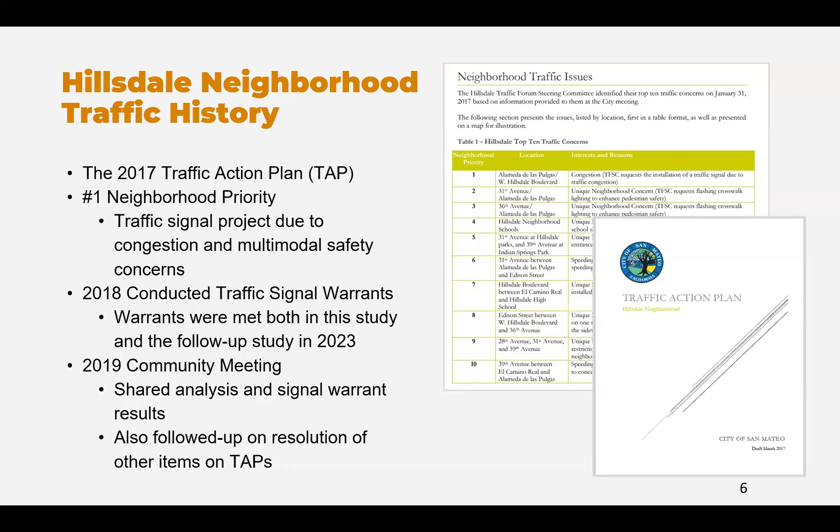In 2019, we held a follow-up community meeting with the Hillsdale neighborhood regarding not only the number one priority, but their top 10 traffic concerns, where we were able to share the analysis results for the Alameda Hillsdale Boulevard intersection, as well as our signal warrant results, sharing with them that the data came back and we could install a traffic signal there as a future project. We also followed up on resolution of different items on the traffic action plan list.

Next, we can move into some of the background items more local to the intersection, as well as pertinent to why the intersection sees the issues that it currently does. The intersection of Hillsdale and Alameda de las Pulgas involves the city's two arterial roadways, Hillsdale being one and Alameda being the other. An arterial roadway is a type of road that serves as a major thoroughfare for the city's transportation network, meant to carry larger volumes of traffic relative to other roadways within the city, for example relative to Fernwood Street or Stephen Road.

Within a half-mile radius of this site exist three schools: Hillsdale High School, Abbott Middle School, and Laurel Elementary School. We have a few parks within the area, so we have a lot of pedestrian activity to access those sites. We also have a hospital, the Hillsdale Branch Library, as well as residential housing.

Currently, the traffic control at the intersection is an all-way stop. If you've driven through there before, or walked or biked, you would be familiar with that. Congestion is apparent during peak traffic hours, especially morning and afternoon, as those hours typically coincide with school pickup and drop-off. Because of that, and because of the intersection's close proximity to the three schools, there are also pedestrian and bike safety concerns. We have a good amount of students using active modes of transportation to get to their final destinations. All these considerations were important for us, not only for satisfaction of the signal warrant study, but also for the different design elements I will talk about later tonight.

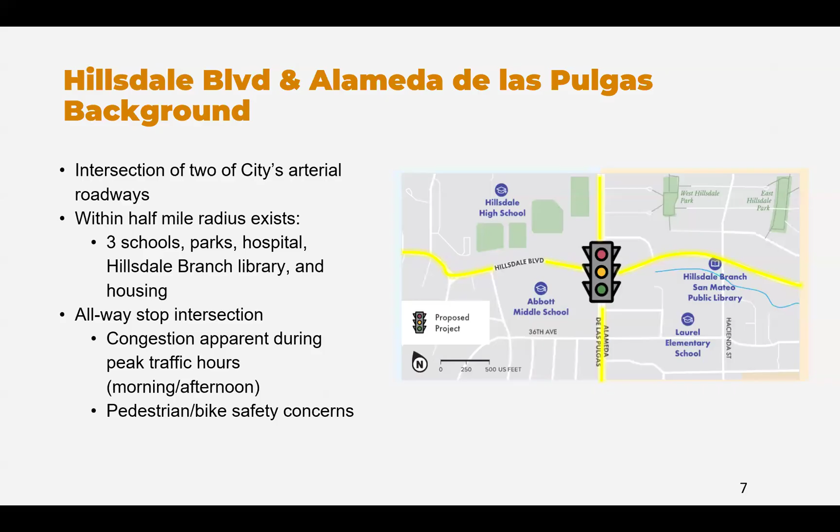Here are the project goals we're looking to satisfy. Firstly, we're looking to reduce neighborhood cut-through traffic through implementation of this project. Currently we have congestion as the all-way stop fails to properly satisfy the demand faced at the intersection. Through our analysis, we found that through signalization efforts, the level of service at the intersection, or the average delay an average driver would experience going through, would decrease significantly. We believe that through that, drivers will be more inclined to take the intersection as opposed to bypassing it altogether, taking alternate routes around it.

Secondly, it also improves pedestrian and bike safety, which are city council priorities for public works this fiscal year, specifically numbers 28 and 40, as well as the general plan policies per the circulation element of the city's General Plan 2040. I'll read them off quickly: C1.2 complete streets, 1.3 vision zero, 1.4 prioritizing pedestrian and bike mobility needs, 3.1 pedestrian network, 4.1 bike network, and 6.1 roadway operations. So as you can see, this project is not only an installation of a traffic signal, but also engineered solutions we're looking to implement to increase all modes of travel and enhance safety of all modes of travel at this intersection, while also reducing congestion.

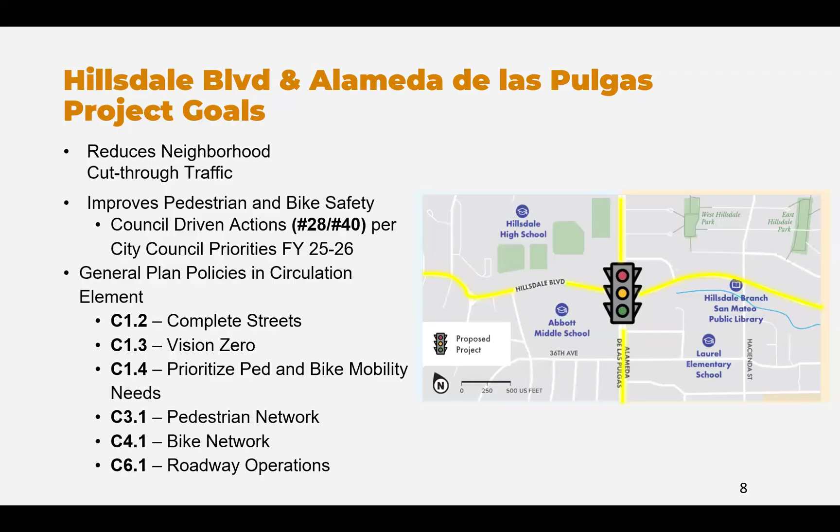With the project overview out of the way, I can also recap on some of the outreach efforts that were done in 2024.

In phase one, we met with the public at the Hillsdale Branch Library. We also met with the hyperlocal residents at the four corners of the intersection in May of 2024. We canvassed door to door to get people to know about the upcoming meetings and the project. We had A-frame messaging along the corridor and other high pedestrian activity areas. We also had an online survey up before the community meeting and a few weeks after, to get specific feedback from residents who wanted to share their vision for how the intersection project should be implemented.

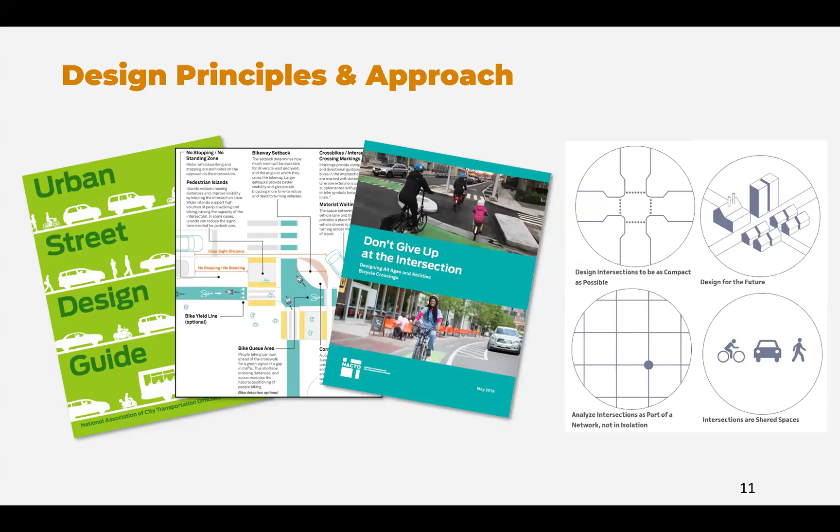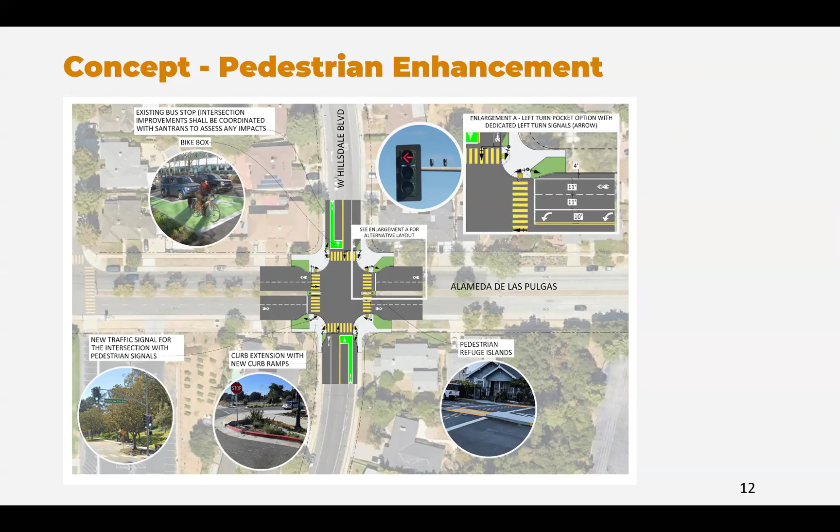This was one of the two design concepts shared at the January 2024 meeting. This design was largely focused on enhancing current pedestrian concerns and pedestrian safety at the intersection through curb extensions, pedestrian refuge islands, and the option for a dedicated left turn signal to separate vehicle and pedestrian phases. Here are those curb extensions I was discussing, the pedestrian refuge islands, and the option for the dedicated left turn signal.

The pedestrian and bike safety will ultimately be achieved with the implementation of protected corners, essentially spaces that only bikes and pedestrians would access. Through engineered measures and sightline principles, drivers will generally be more aware of other users at the intersection. The protected corners also achieve shortened crossing distances, acting as a curb bulb-out like the prior design.

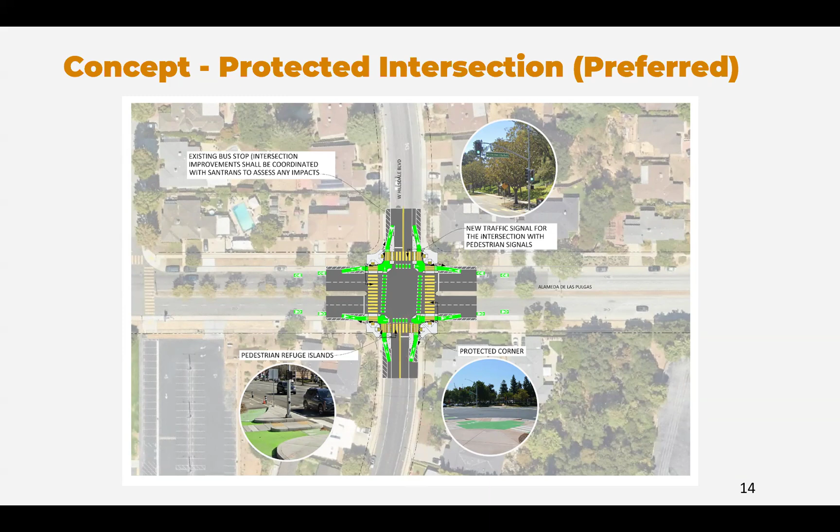So here I'll zoom in a little bit. We have the protected corner. Pedestrian refuge islands were still able to be implemented through this option, and obviously the signal efforts as well.

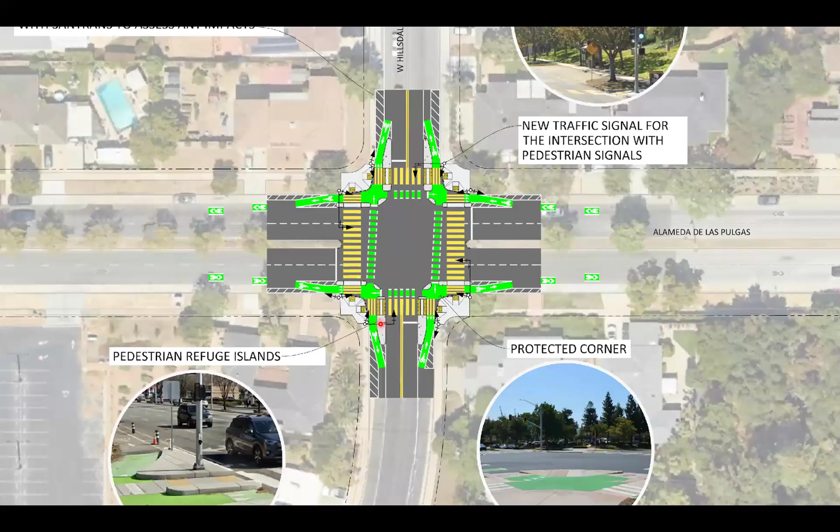The congestion caused by the signal was expressed by the community at this meeting, despite the fact that we did share a little bit about our traffic analysis done, and like I mentioned before, that the level of service would be much improved through the implementation of the signal. Lastly, drivers turn too quickly at the corners of the intersection currently.

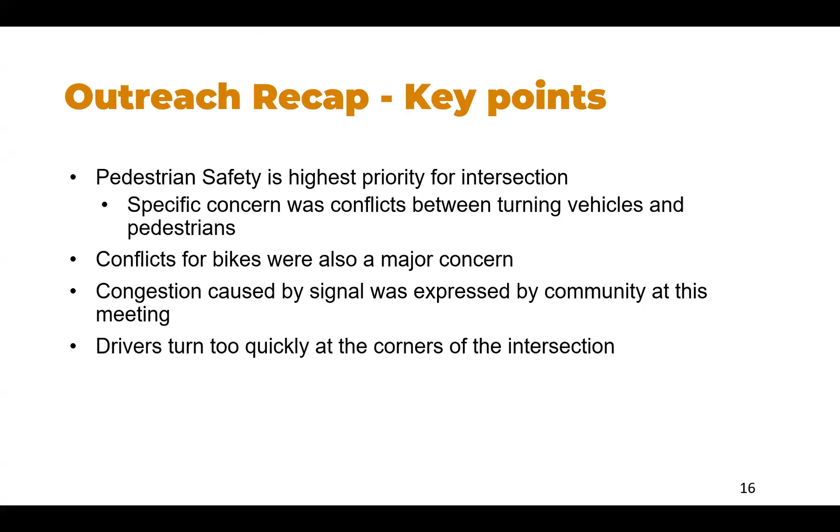So with that, in the next few slides I'll be going over the revised design, which further developed the community's preferred protected intersection concept, while simultaneously looking to address some of the feedback received during the January 2024 meeting, as well as feedback received from other stakeholders. Of note is that we were actually able to incorporate certain design elements such as the dedicated left turn pocket and left turn signal for this design to address pedestrian safety concerns, as well as concerns related to congestion at the intersection.

So here's an overview of that revised design, a zoomed in shot. Here we have Alameda de las Pulgas going left to right, left being north, and West Hillsdale Boulevard going up and down your screen, west being towards the bottom of your screen.

The outreach key points I just read off are found on that smaller table to the bottom left of your screen. You can see through the revised design, in the second column of that same table, I bolded the language relevant to how this revised design was able to look at the feedback received and consider a specific design element to satisfy the concerns of our public.

So in this case, for pedestrian safety, the revised design reduces crossing distances for pedestrians at the intersection while providing the dedicated pedestrian crossing phase. Here we have those red arrows on your screen depicting the shortened crossing distances. Like I mentioned before, using those protected corners we're able to achieve a very similar effect that was shown at the pedestrian enhancement design concept. So folks using the intersection not only as a pedestrian, but also as a bike, will be generally less exposed to traffic as they cross Alameda or West Hillsdale Boulevard.

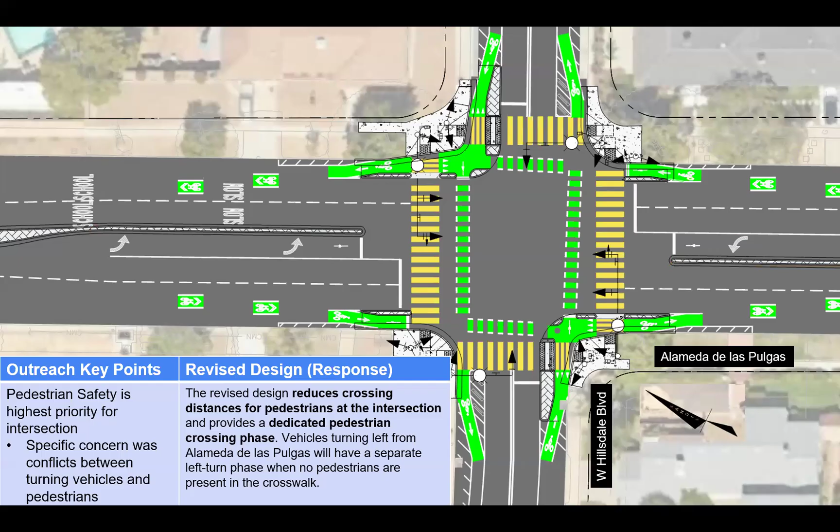Next, we have the outreach key point regarding conflicts for bikes being a major concern. Here on your screen, I've boxed those cross bike markings. Bikes will be able to navigate the intersection more comfortably, guided by these cross bike markings. I only highlighted the ones across Alameda, but we're looking to implement ones crossing West Hillsdale Boulevard as well, along with the use of these physically protected corners that restrict vehicle encroachment. Here I boxed the protected corners. Through the use of these corners, bikes will be essentially protected and shielded from vehicular traffic altogether, and bikes would be able to really be within the line of sight of a stopped vehicle.

So in this example, headed east, a bike would actually wait for their green light well ahead of a vehicle queued, also headed eastbound or making their left turn. This would generally improve their visibility and increase driver awareness, helping to reduce the potential for right hook collisions. The benefit of these protected corners also allows bikes to complete a two-stage turn relatively comfortably, especially for less experienced bikers looking to navigate this intersection. This is definitely one such advantage from the protected intersection concept that we are happy to incorporate.

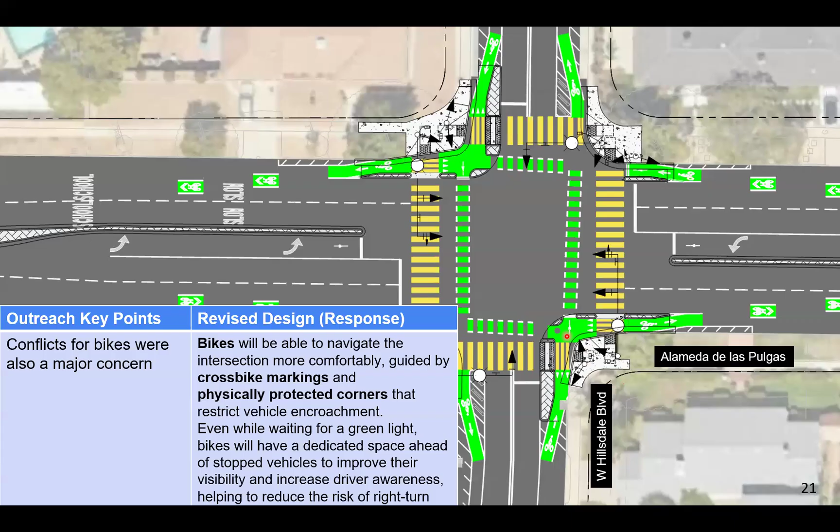Next, we definitely heard feedback from residents that even despite the signalization efforts, congestion would be caused by the signal. So this revised design actually accommodates the left turn pockets as mentioned before, providing that dedicated left turn phase for traffic turning from Alameda onto West Hillsdale Boulevard. This improvement relieves current traffic and turning congestion while also reducing those conflict points between pedestrians and drivers.

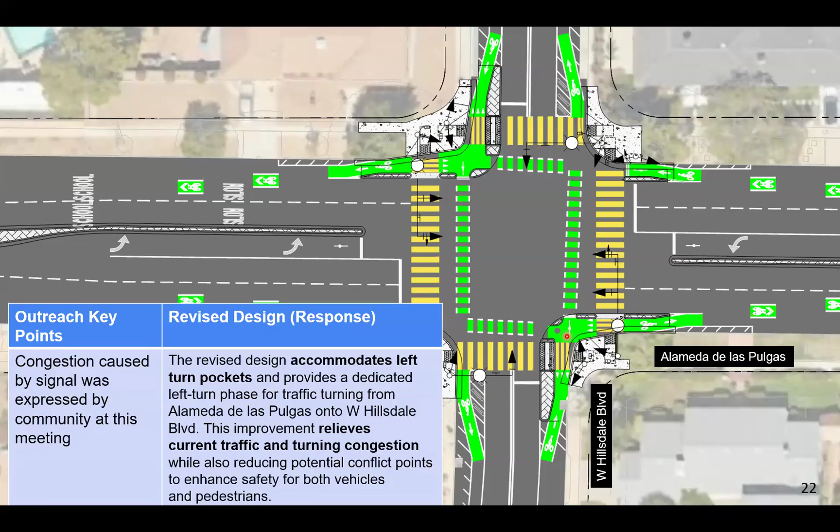And lastly, drivers just turning too quickly at the corners of the intersection. So with this revised design, we were able to basically keep the protected corners, but we added rubber speed wedges to encourage drivers to make slower and more deliberate right angle turns, improving visibility and safety for all modes of travel.

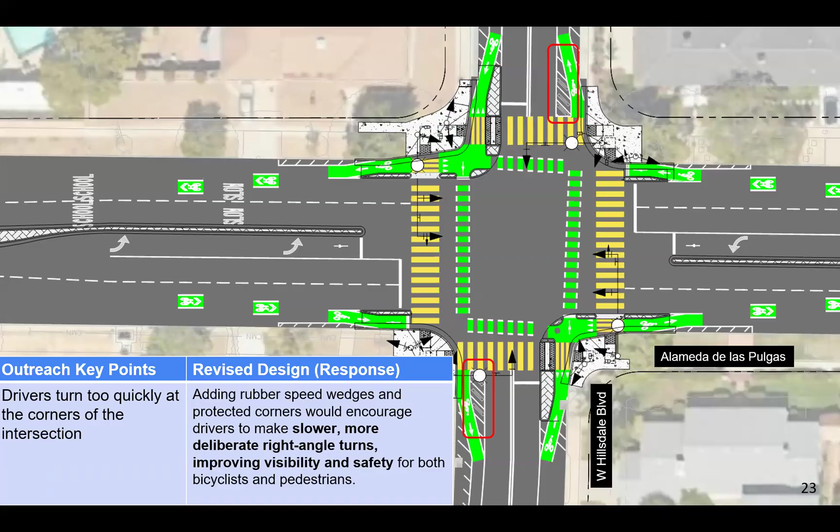Here are some revised design changes made from the preferred design alternative from that January meeting. As I discussed earlier, we were able to incorporate left turn pockets as well as the dedicated left turn signal on Alameda to the preferred design alternative, as originally it did not have one. We actually made the left turn lanes longer, partly to address concerns about congestion despite our efforts to signalize the intersection, but also because the project originally sought to minimize impacts to trees within a median island.

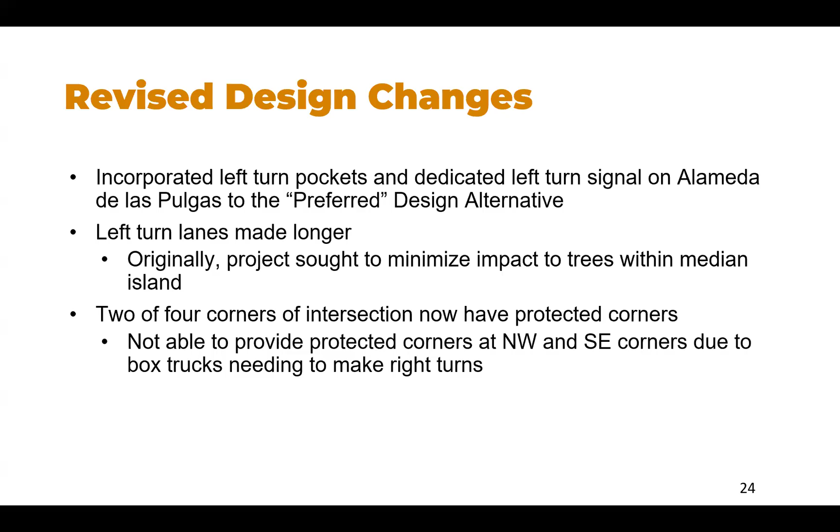So even though it is a partially protected intersection, we believe that it's definitely better, due to the reasons I just mentioned, to at least partially protect the intersection to achieve safety enhancements for our pedestrians and bikes.

Parking is also something that our residents definitely ask about. In this slide here, we're just showing the southeast corner, and how really outside of the general vicinity of the actual intersection improvements, parking will generally be maintained. Basically anywhere outside of those buffered bike areas, any unmarked parking stalls at Alameda and also on West Hillsdale will be maintained, typically mid-block as shown here.

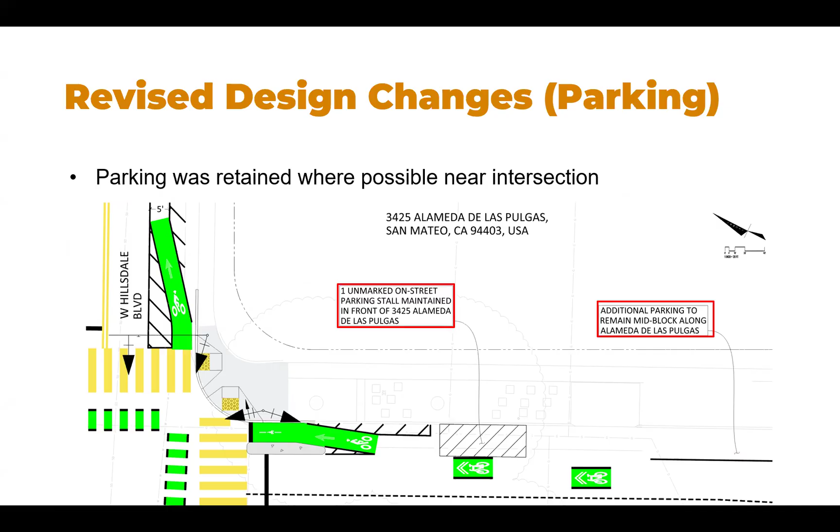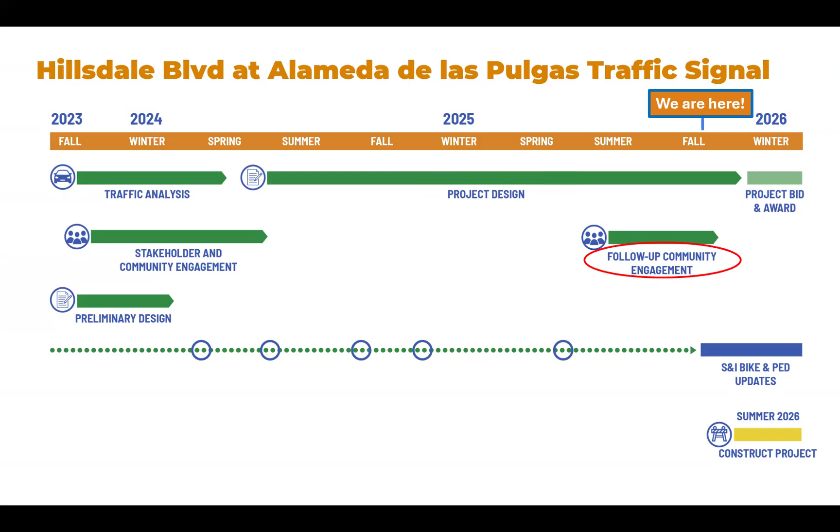We're following up with the community this week with the in-person meeting options as well as tonight's virtual meeting option. Lastly, the project is fully funded for construction and will likely bid and award the project through City Council in winter of this year into 2026, and be able to implement the project and traffic signals by summer of 2026.

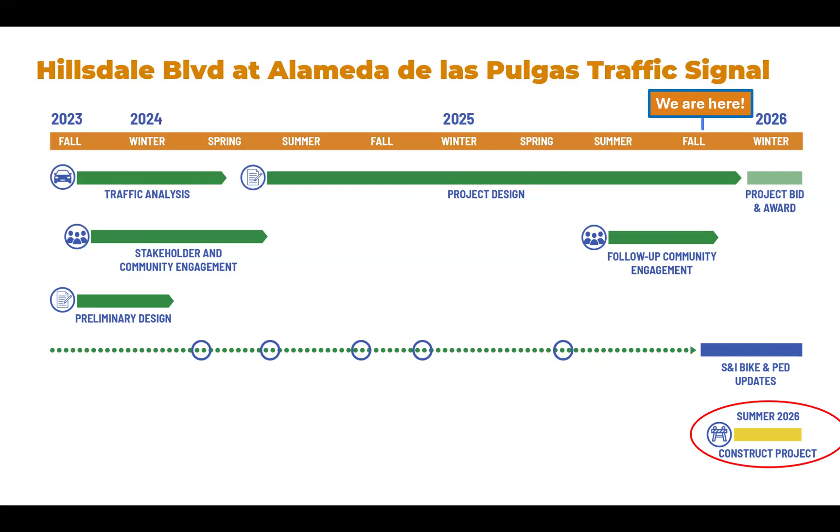I do want to quickly go over some general questions that we believe could be thought about by those attending tonight, to get actionable questions or actionable feedback for the project design team. We split it up in the left column by different topic areas that you can consider as you look at or think back to the project design, and I'll also show the project design again.

We thought generally about overall design, how folks can look at the layout working for everyone at the intersection for people driving, walking, and biking. Questions you could consider asking yourself regarding walking and bike comfort and safety, as well as traffic operations and your experience driving through the intersection post-project, and also the design details I was sharing about. Questions such as: is it clear where each mode—car, bike, and pedestrian—should go in this design? And lastly, transitioning and educating everyone regarding the project, even during construction and after it is built. These are all questions we believe could get good feedback from you all as we take the project through to bid and into construction.

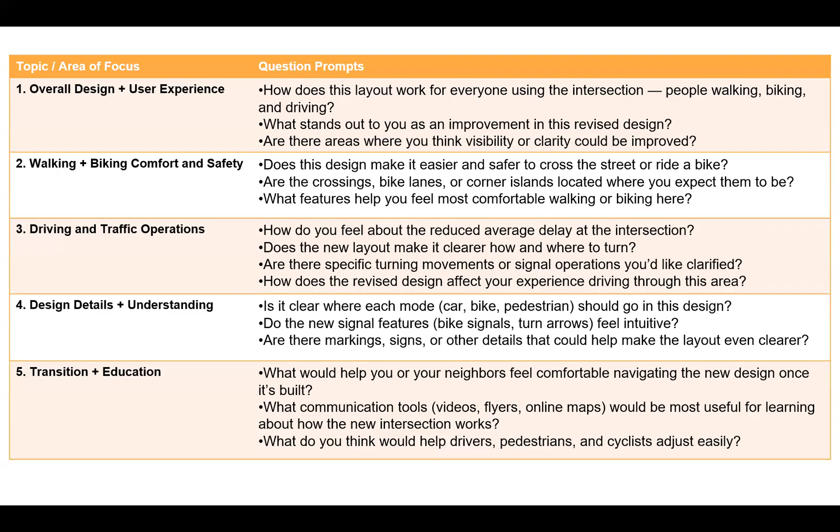I'll turn to that slide while I have Joe or Bethany answer. Sure, I can speak. Oh, go ahead, Bethany. Sorry, Joe, I was going to jump in really quickly. Go for it. Sing's going to pull up a slide to show you what the intersection operation is going to look like.

We don't actually have a great slide to demonstrate it, but what's going to happen is you'll have the protected left turns coming from Alameda, and then for each leg of Hillsdale, they'll each have their own green light with its own dedicated left turn. So once eastbound Hillsdale goes, it'll have the ability to have a left turn, a through, and a right turn. For pedestrians crossing, I don't think I have the ability to do a laser here, but there wouldn't be a pedestrian conflict when you have that particular green light.

You would have the pedestrians going parallel to that movement. Maybe you can help describe that with a laser if you have that ability. So each leg on Hillsdale will have that ability and won't have that left turn conflict.

As far as the truck movements go, that's a design criteria we use throughout the city. It's really things like UPS trucks, not really big delivery trucks or substantial grocery store size trucks. These are really common delivery trucks that we see all the time, and we think it's important to accommodate for them in our designs. This isn't something we're looking at uniquely with this intersection, it's something we look at all around the city.

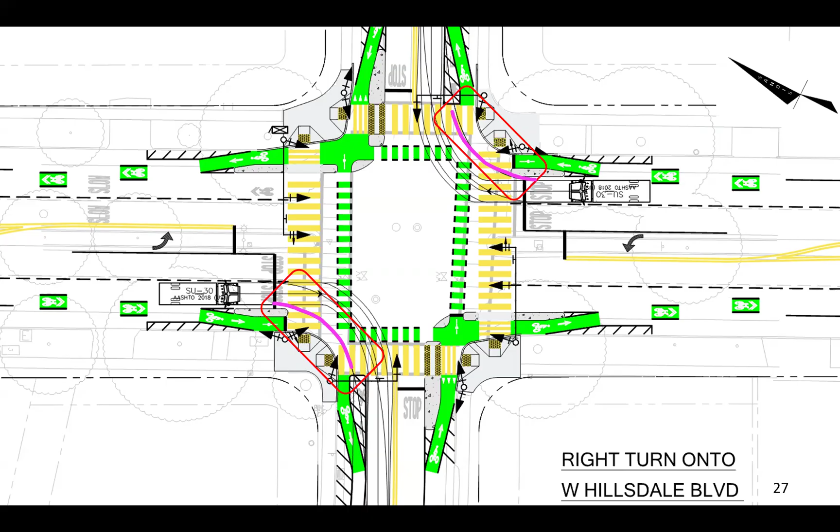Joe, did you have any take on that? Sure, I can offer what we considered as part of the design. We are looking to maintain the existing drainage infrastructure out there. The exception would be at the medians where there are existing storm drain inlets, which are being replaced as the location is being shifted. But all of the existing drainage along the curbs is being maintained. We did make sure that as we designed the curbs, they had adequate flow around them so that water won't pool directly in front of the curb ramps or right at the corner of the intersections.

A little off the subject, but down there by Laurelwood School on 36th, where they've got the drainage, the curbs and everything else is really terrible. Is this a new curb ramp that was recently done, or existing problems? It's been there for years, and all the curb is broken up. There's not a clear traffic flow, and the drainage there is also terrible.

Definitely, maybe we can look into that issue just as a side matter. That would be great. I'll probably message you to confirm the actual location of the issue, but maybe it needs some maintenance. Thank you. Sure, and thank you for your comment. Thank you.